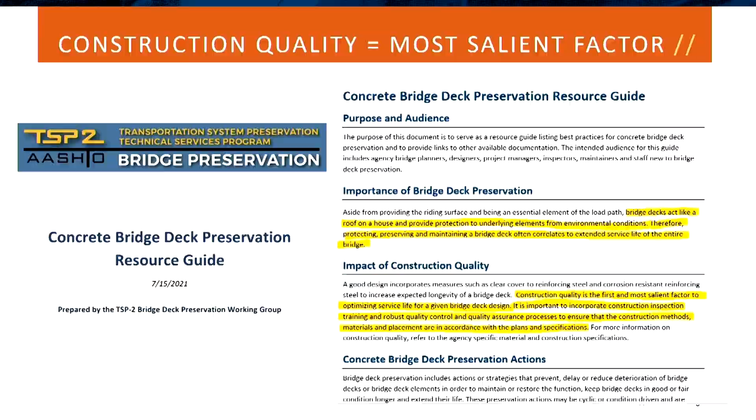We do know bridge decks are eventually going to crack, but early age deck cracking can be a real problem since maintenance and preservation is needed too soon after construction.

Jim Nelson with the Iowa DOT, head of AASHTO T9, did a webinar recently on remediating bridge deck cracking. He referenced early age deck cracking as a significant problem.

You can see this bridge here, constructed in 2019, developed transverse cracking across the majority of the deck within two years. There are a lot of reasons why early age cracking can occur, but it's something we're all trying to get a handle on, because now it's a maintenance problem with treatment needed within just two years.

And we all know, getting back to that bridge, doing maintenance of traffic is going to be a huge expense to get that work done.

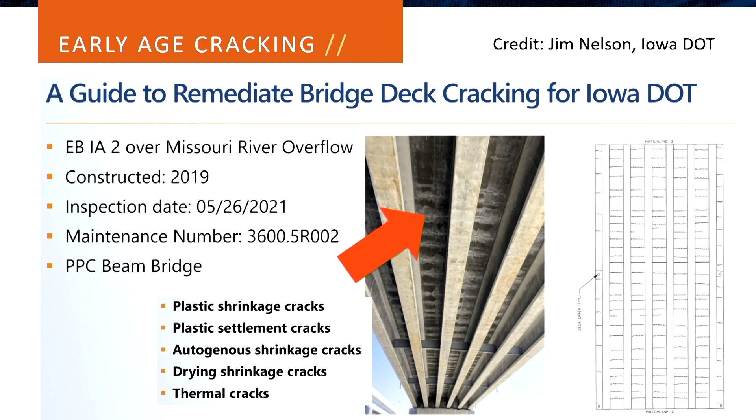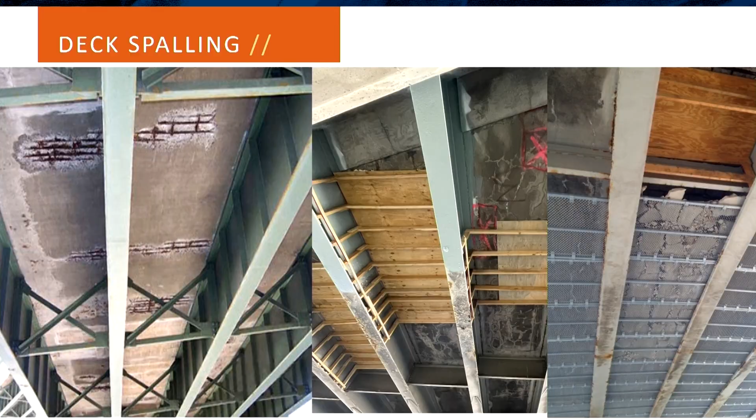But decks are eventually going to crack, and as we know, efflorescence appears, moisture starts to penetrate the deck, reinforcing starts to deteriorate, cracks start to grow, and over time rust, deck spalling, and delamination start to occur. We want to push this out into the future as long as possible.

So how do we improve bridge deck construction quality? Today we're going to focus on three aspects of construction and new technologies for each: deck forming, concrete curing, and concrete maturity testing.

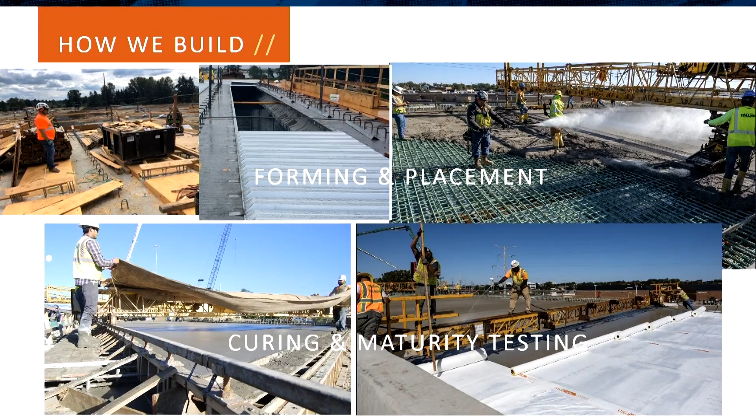How do deck forming systems influence performance on service life? Do contractors remove wood decking too soon? Does lumber pull moisture from the concrete during curing? Do corrugations of metal forms restrict concrete as it shrinks, putting stress into the deck? Temperatures, wind, humidity, travel time, pumping operations, compaction, vibration - how do all these factors influence deck performance?

Another thing to keep in mind: are contractors adding too much water as they're trying to finish it? And when do we open the bridge deck to traffic?

QA/QC is another important topic in our industry today. We've been using cylinders for 100 years, but are those cylinders cured in a separate environment? Are they the best way to measure the strength of the deck concrete in place, which has a larger mass and more restraints? Does the deck have more or less strength compared to the cylinders?

And we use these cylinders to decide when to open the deck. Are we doing it too soon sometimes?

Also, when you think of construction inspection during the deck pour, if metal pans are used for the decking, do we know if that concrete is consolidated properly throughout the bridge?

And then looking after construction, when doing routine inspections of the deck, how confident are we in the rating inspectors give if they can't see the underside of the deck because of a stay-in-place form? It's really difficult to assess that condition.

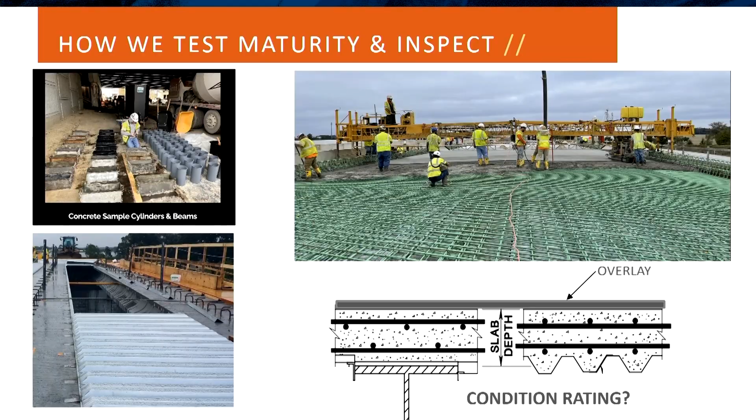We're going to talk about the I-469 project that incorporated three technologies into a single bridge to help Indiana DOT address some of these problems: transparent stay-in-place forms, E5 internal cure plus liquid fly ash, and Giatec and WaveLogix sensors for measuring maturity.

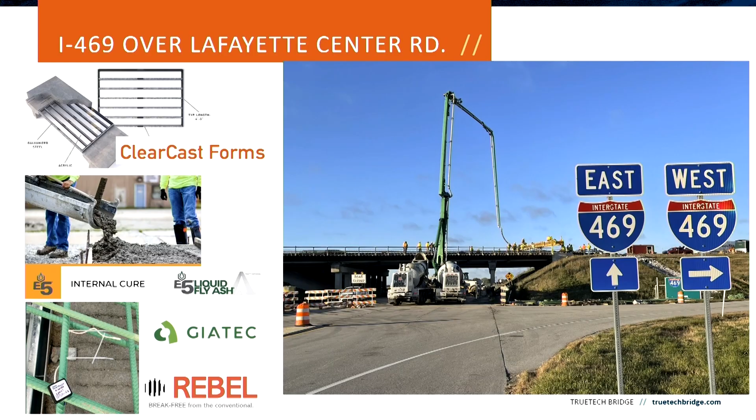Indiana DOT had used transparent stay-in-place forms on a project previously, and had also used E5 internal cure previously, but they had not had the combination of E5 with liquid fly ash, and they had never used WaveLogix sensors to measure the in-place strength of the deck concrete. I'll be discussing the transparent stay-in-place forms, then I'll bring Robert up to talk about the other two.

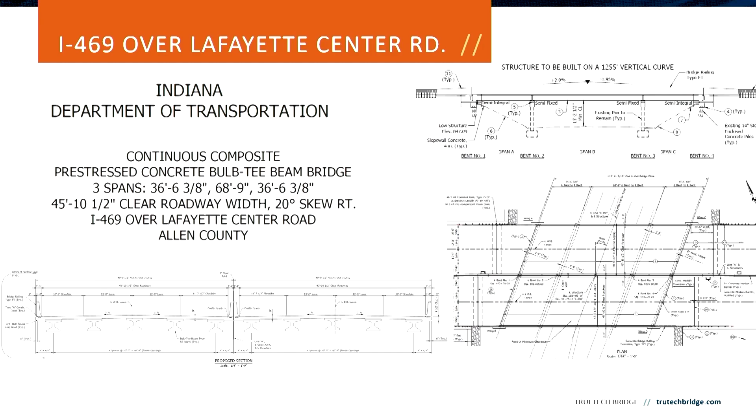This project was a bridge replacement along a major highway in Fort Wayne, Indiana. It was a 3-span bridge composed of bulb T beams, built in 2 stages: the eastbound in the spring of 2021, the westbound in October of 2021.

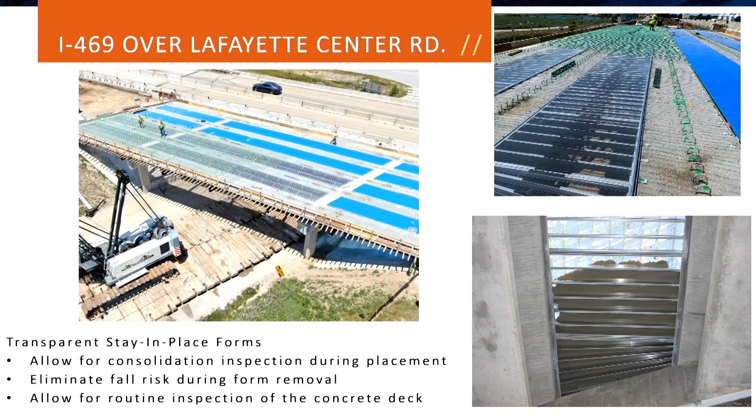TrueTech Bridge designed and supplied the transparent stay-in-place deck forms for the project. These forms allow for inspection of concrete during the deck pour so that any honeycombing or poor consolidation is avoided. They eliminate the need to strip forms from below, reducing risk to contractors over traffic, railroads, and heights, and they allow owners to see the underside of the deck during routine inspections to accurately determine the condition state.

Here's a short video of the two stages being constructed.

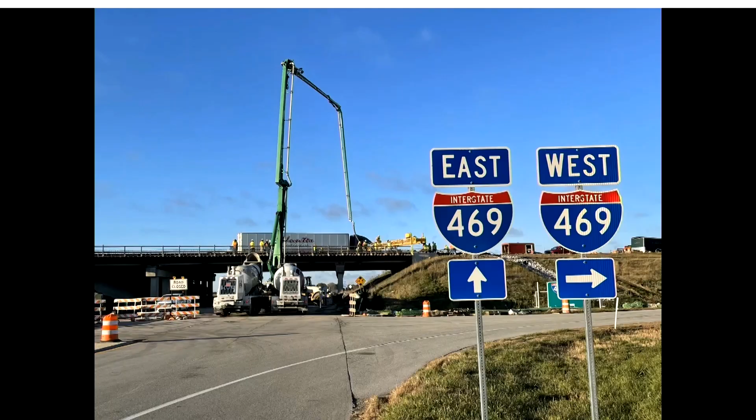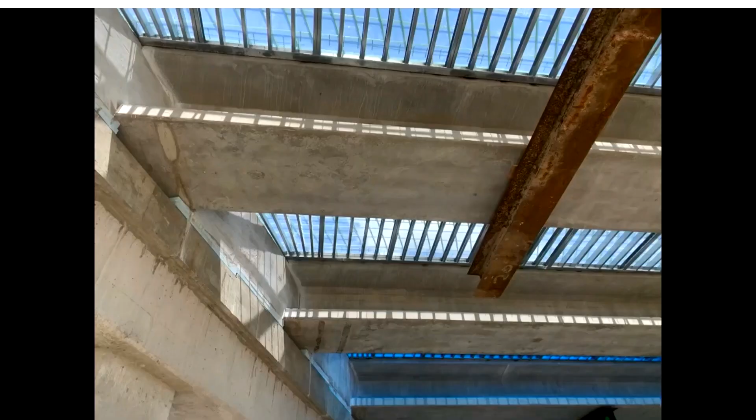We supply the shop drawings and prefabricate all the forms custom to each project, delivering them on pallets to the contractor when needed. This project was 6,300 square feet of panels, each panel 6 foot by 4 foot and weighing approximately 75 pounds, easy for 2 people to pick up and put in place on the bridge.

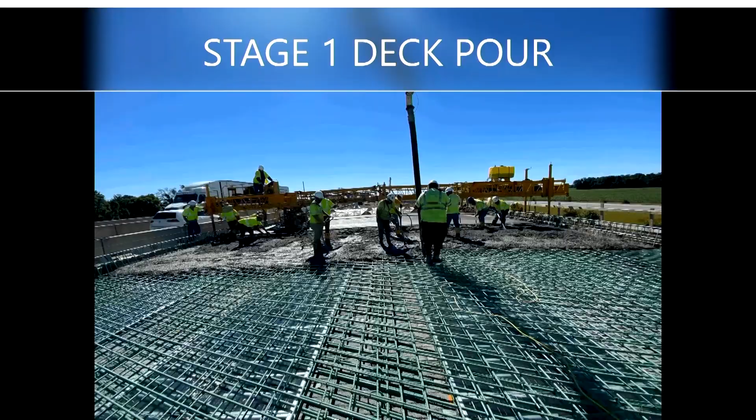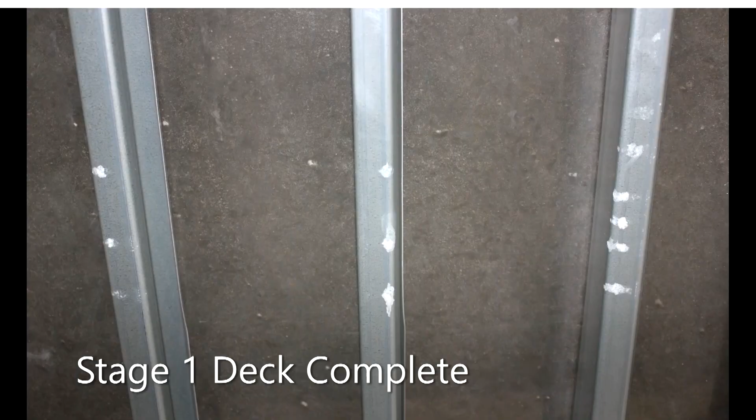It took a crew of 3 about 2.5 days to install each stage. We supplied skewed forms at all the abutments and diaphragms to help keep all the construction forming top down.

Rebar installation is exactly the same as any other forming system, except we do tighten up the rebar chairs to keep some of the high stresses off the top of the plastic sheet. The deck pour went really well for both the eastbound and westbound, being the first time with this contractor, and also using the mix design that Robert's going to talk about soon.

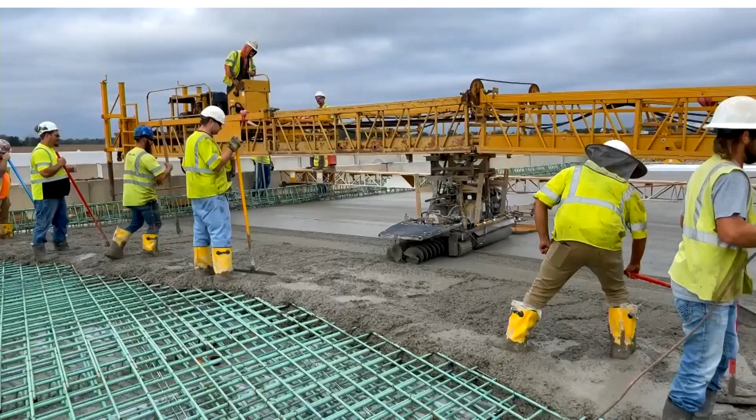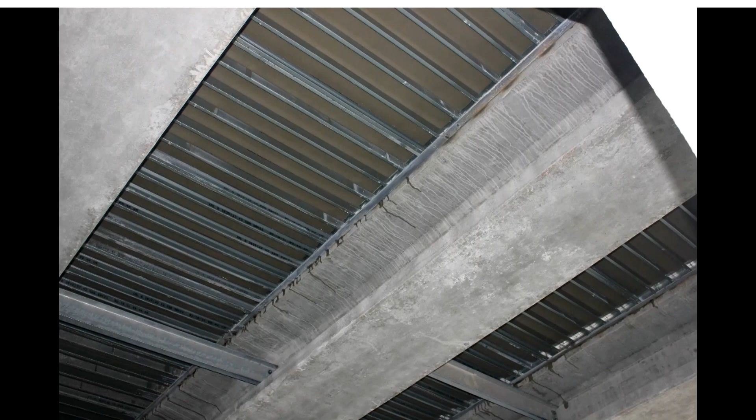This project attracted a lot of attention from personnel within construction, preservation, and inspection from Indiana, not only the district but central office as well. Being below the bridge deck, seeing the placement, it's a very unique view. If you ever get a chance to visit a bridge, I suggest you do so.

Keith Lighton, INDOT's asset management and bridge preservation engineer, shared a quote regarding the ability to inspect during the deck pour. Keith also gave me an update on the status of the most recent inspections, saying both decks, the underside of the deck and the forms, are in great condition after 2 years, and they're both still rated as 9s.

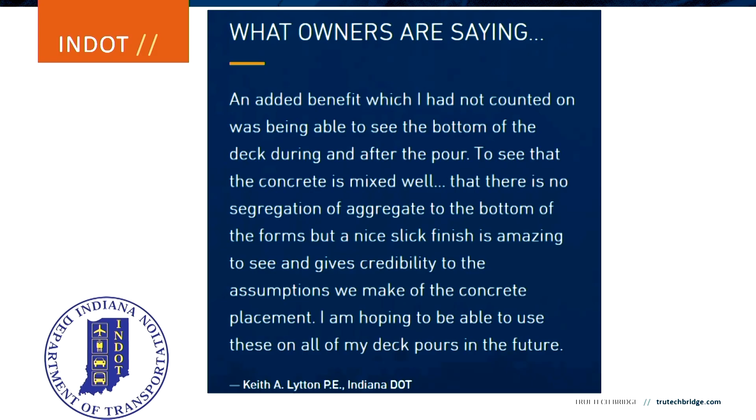Transparent forms helped Keith address his concerns of deck quality during casting. He likes knowing he can see the underside of the deck in the future for inspections, because he is concerned that some of his 30 or 40-year-old decks with corrugated metal, he doesn't know the condition. So this is a solution he would like to continue to see in his district.

In terms of what's next with Indiana DOT and transparent forms, last fall they did a large bridge replacement along I-469 over a river crossing, and gave contractors an option to use either form and strip it with lumber or use transparent stay-in-place forms, because INDOT wanted to see the bottom of the deck on this bridge. When it went out to bid, the low bid contractor chose to use transparent stay-in-place forms, and this job is under construction, stage 2 of 4 currently, and is going really well.

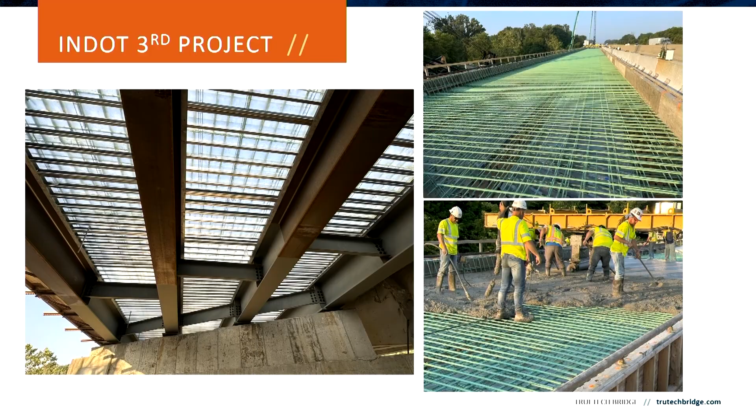So with that, I'll transition to Robert to share more about internal cure and the sensor technologies that were used on this project.

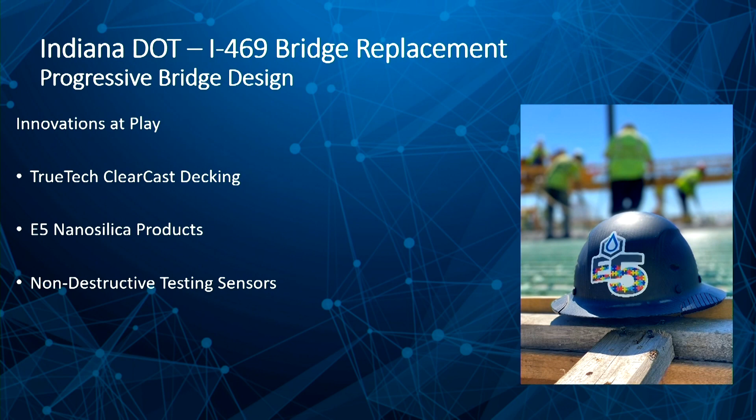Prior to the I-469 job, Indiana DOT had quite a bit of experience with these E5 products. The E5 internal cure specifically - they started using it and did their first bridge trial in 2016. They quickly recognized the benefits and potential, and by way of memo, not specification, after seeing about 80 bridges in place with 30 to 60% reduced cracking, they wrote a memo that allows contractors an alternative to 7-day wet cure. You use the E5 internal cure, it consumes the water of convenience, so there is no bleed water, and ultimately you can remove the 7-day wet cure process - the materials, the cost, the carbon footprint, all of that.

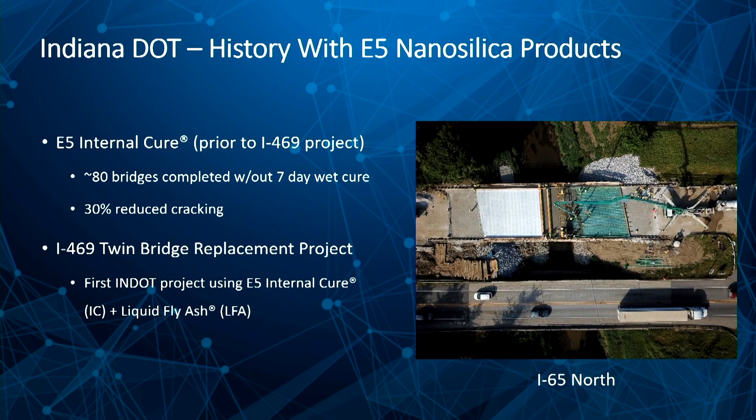With the I-469 twin bridge replacement, this was going to be the first project where they actually used both the liquid fly ash and the internal cure product together. They both have individual benefits, both to fresh and hardened properties.

So the internal cure, what's it do? It controls the water, right? It cures the concrete from the inside out. These are Dr. Jason Weiss and Dr. Luna Lu's words - they've done years of research on these products and firmly stand behind them. The liquid fly ash actually consumes the calcium hydroxide to form new calcium silicate hydrate in existing concrete.

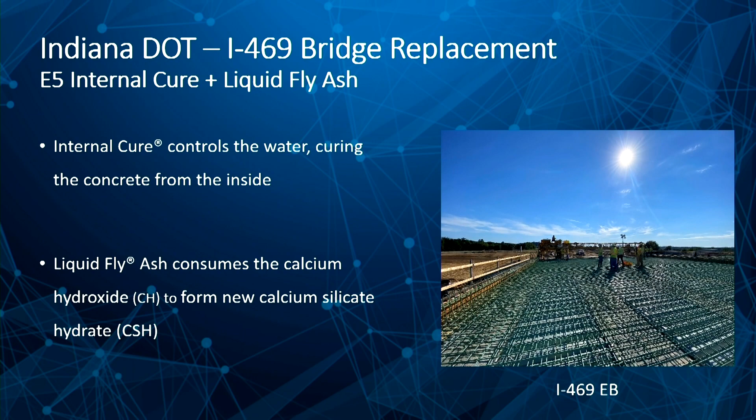Individually, for fresh properties, the internal cure - because that water of convenience is not evaporating, it's being contained within the concrete - slump retention is not an issue. Folks don't have to add water when the truck arrives halfway through discharge, and don't have to add it to the surface. These products were created by a third-generation finisher for finishers. They're meant to make placement and finishing easier and make concrete more durable so finishers don't get callbacks later because the concrete hasn't performed well. So it eases placement and finishing.

When you put these chemicals into concrete, the hydraulic pump pressure will drop. Traditionally, it might be running at 4,000 PSI - you put these products in, it'll drop to 2,800 or 3,000 PSI. You can pump these products because they become creamier, easier to move and finish. That translates into the hose - they can be pumped further horizontal distances, higher vertical distances. Because that pump pressure comes down, that's better emissions, less fuel per given yard of concrete pumped, and that equipment can maintain service for a longer number of service hours. We've seen folks who took pumps out of service after a certain number of hours - once they adopted the E5 products, they brought those pumps back into service because they can pump those mixes more efficiently. So it helps that contractor again.

For hardened concrete, it reduces shrinkage and improves surface durability. The E5 liquid fly ash - Dr. Jason Weiss says it's a direct replacement. It is a liquid supplementary cementitious material. It can be used to replace SCMs or reduce cement. It's consistent and readily available - one tank of this can replace 28 tanker loads of fly ash being delivered to a concrete plant. It has no influence on air content. Imagine using an SCM that's always available - you don't have to chase air.

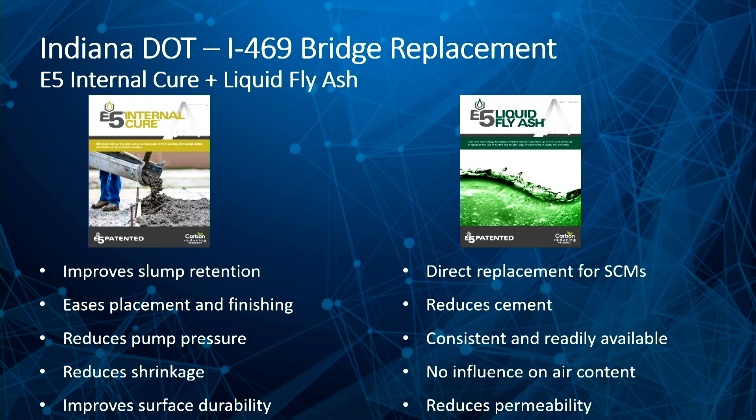You don't have to lose loads. That's what our producers are experiencing. Lost loads are no longer an issue. In the hardened concrete, it reduces the permeability, as you would see with traditional fly ash and supplementary materials.

So to go out onto this job, we did quite a bit of lab testing. In those 80 bridges, we just used the Indiana bridge deck mix that you see there in that column, essentially with a type 1 cement. Now these numbers change with a 1L, this was done a few years ago. It was a 658 type 1 with 20 pounds per cubic yard of microsilica with a 0.42 water-cement ratio.

In the memo that Indiana DOT wrote, allowing contractors to use these products, what they've allowed is that you can now use a water to cement ratio up to a 0.49, because over the course of 300 decks now, they've observed that higher water to cement ratio, the water is consumed and does not create a problem with durability or degradation down the line.

So you can see here that we optimized the mix. We didn't just add these chemicals in there to try to increase strength. We dropped 78 pounds per cubic yard of cement, and we removed the microsilica, 20 pounds per cubic yard. So we've taken about 15% of the cementitious content out, and we increased the water to cement ratio by 12%.

So we've done some good on the materials. You look at the destructive testing, you see that line of compressive strength results. 6,200 - we dropped 15% of the cementitious content and increased the strength by 6%. Qualifies for a 5,000 through ACI 318. I think you need 6,400. So we had a little bit of buffer there.

The anomaly lies in the flexural strength. This is a 600 PSI at 28-day design. Their mix got 720 - that's pretty expected, pretty reasonable. Our mix got 1140. It's great to increase flexural strength like that, great to improve the cement efficiency by 20%. But is that a problem?

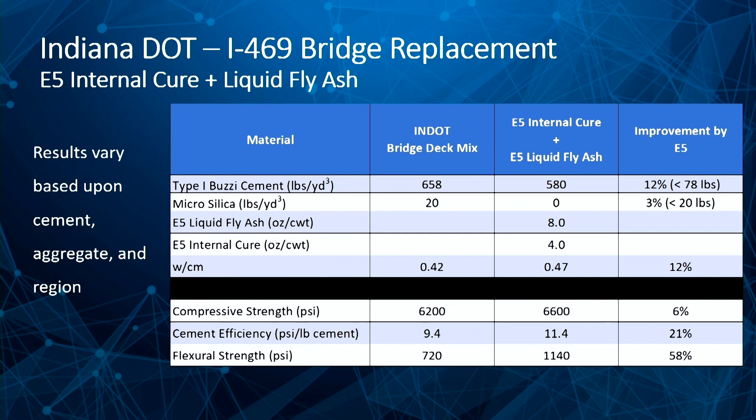You don't see this regularly, so we were a bit concerned. We ran the calculations to determine conservative versus a little higher flexural strength based on compressive, and our numbers still far exceeded what we were measuring and what the third-party lab measured.

So what do you do? You pull cores. You send them to Dr. Luna Lu. You say, Luna, what are we doing here? Are we in trouble? And Luna says, no, there's no issue. You guys are in good shape.

There's 3 phases of concrete. You may have only learned about 2 in school - the mortar fraction and the aggregate. But there's the interfacial transition zone, this ITZ, which is the immediate area around the aggregate where the cement paste bonds to that aggregate. In this area is a significantly higher water to cement ratio and abundance of calcium hydroxide. She refers to the ITZ as the weakest link in concrete, the failure mode in concrete.

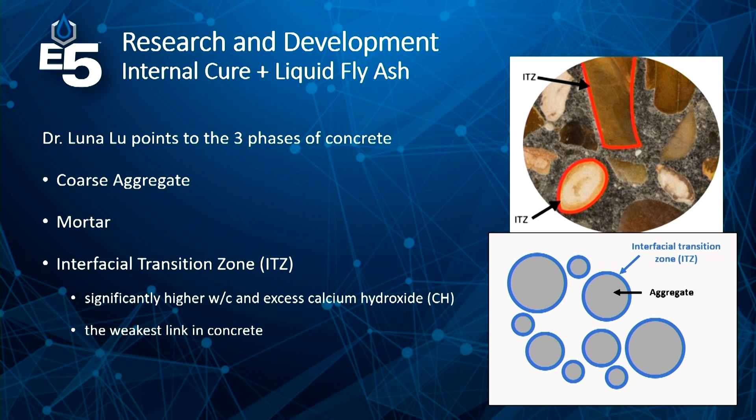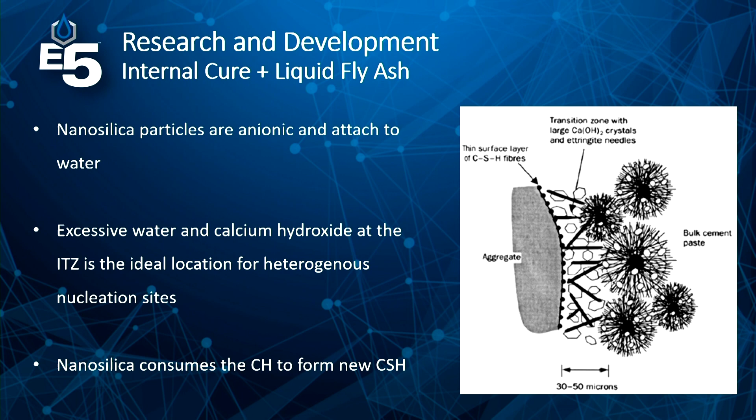Well, if you look at this diagram, what happens is that the bulk cement particles are kind of on the outside - they're the ones trying to get in, and they're too big to fit in the 40 micron space that's up close in the ITZ, where that excess water and calcium hydroxide is. Nanosilica particles are doubly negative charged, anionic, and attracted to water, and they're much, much smaller than cement. So they weave their way into that area, and where that water and calcium hydroxide is becomes ideal locations for heterogeneous nucleation sites. Essentially, the nanosilica consumes the calcium hydroxide to form new calcium silicate hydrate.

When you improve the ITZ, you experience an enhanced aggregate bond. You reduce microcracking, you improve the resistance to abrasion, and you improve the concrete ductility. This concrete was able to bend more, and the aggregate didn't pull out before it failed.

Forgot to say, that's a 1-day break with the E5. Look at all that aggregate fracture in there. Usually you see a lot of pull out at that break.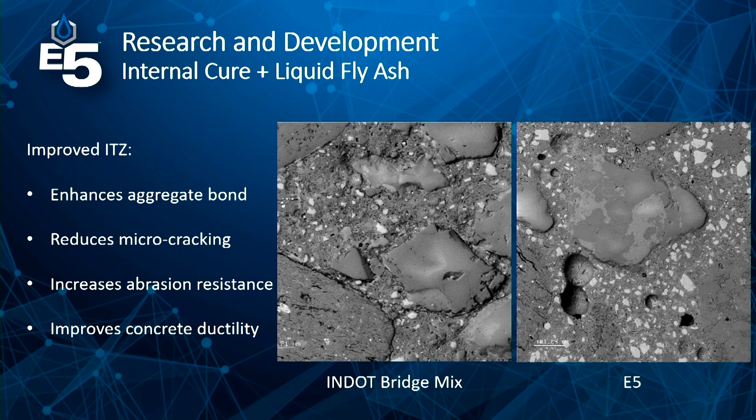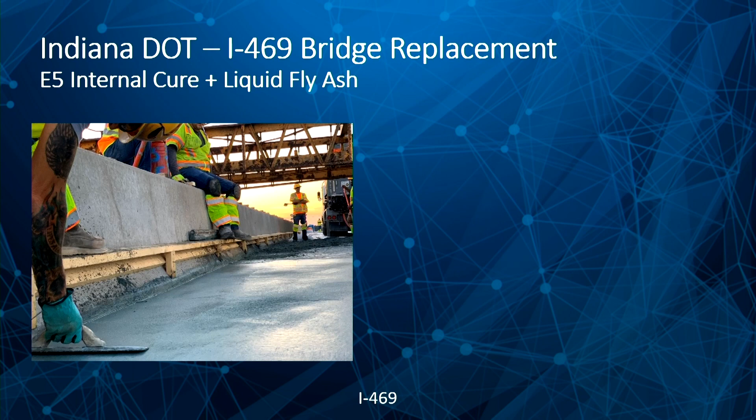This is what you see on E5 projects. Folks are comfortable. They're not running, not freaking out, not throwing water. With the memo with Indiana DOT, no water is allowed to be added to the surface on the job, and a water reducer is allowed, but no water reducer is required because the E5 brings that property in.

So what did we save? When you wet cure, our contractor uses about 5 pounds of water, or 0.6 gallons per square foot. Across 14,000 square feet, we saved 8,300 gallons of water. I live in Colorado. Water's a big thing. It's been a big thing for a long while.

Cement, aggregate, those are all the topics of today. Water will be a problem. We will be talking about water in the years to come. Keep in mind, if you can save water, you will be in a much better position down the road.

Cost savings: the mix was $35 cheaper per cubic yard. We saved over $16,000. Am I okay on time?

Okay, time savings. These products are for the finisher, for the installer, so they can do it easier and faster. They can place and finish more in a given day. They are able to cut 7 days off the cure time, more than a week off of the construction schedule.

When you talk about carbon footprint and sustainability, we're able to accomplish this a couple different ways. When we talk about materials, cement's the hot button, concrete's about a 1-to-1 ratio of CO2 to pound of cement. We saved about 90 pounds of CO2 per cubic yard, or about 43,000 pounds of CO2 from going into the atmosphere for this project.

We saved over 37,000 pounds of cement and 9,000 pounds of microsilica. That's a lot of material still sitting in the silo at that producer to use for your next job. No worry about running out of materials.

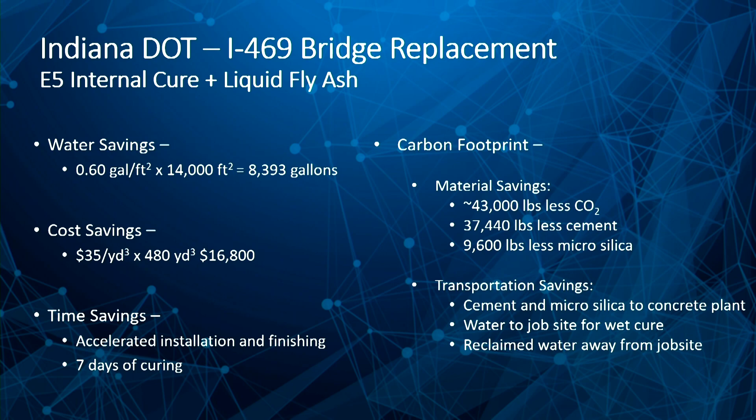Allocation's not an issue. Transportation - those materials have to get to site. The cement, the microsilica, it's got to get to the concrete plant. That water, that 9,000 or 8,300 gallons, has to get to the site. That's trucked in, used for wet cure, and it's got to be reclaimed and trucked off the site to be treated and recycled. And you're probably not getting the wet cure that you actually paid for.

So when we talk about the sensors, a third or fourth innovation almost that INDOT was looking at, they're working a collaborative effort with Dr. Luna Lu and Indiana DOT for the last several years. This was one of the earlier projects where we had done the destructive testing, the compressive strength and the flexural. Luna was developing these Rebel concrete sensors made by a company now named WaveLogix.

She wanted to do some development work on this project. Dave showed a picture of these sensors attached to the steel, the Giatec SmartRock with the REBEL. With the Giatec, you basically do a bunch of testing, establish a time temperature curve, embed these in-situ sensors, monitor the time temp, and you can spot when you hit the compressive strength of the design and open to service. It should accelerate your construction schedule, save on resources having to break.

Luna's attempt is to use this piezoelectric sensor. It measures direct in-situ stiffness and correlates it to compressive strength. The beauty of these sensors is there's no preliminary testing and batching required - you don't have to develop that curve beforehand. So while it's not exactly the same measurement, it should remove a lot of the initial work that's necessary to get good results with the maturity sensors.